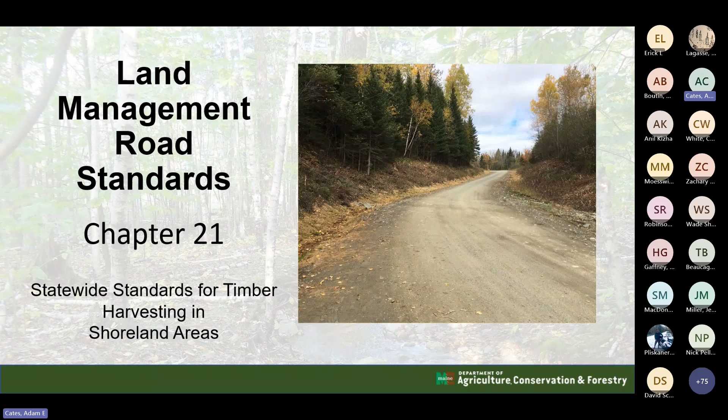Roads are a fairly short section here. There's not a lot new. I think you'll find that the roads are pretty much what everyone's doing now. I can't think of anything that would be different other than setbacks from water bodies, so we'll spend a little time on that.

So for us, this goes back to the jurisdiction thing. For us to have jurisdiction, the land management road must be primarily for timber harvesting and related activities. If it's a road to someone's camp and there's no timber harvesting involved, it's just a driveway to someone's camp, that's LUPC jurisdiction. It has to be a land management road for us to have jurisdiction. It does not include skid trails. By definition, they've got a difference.

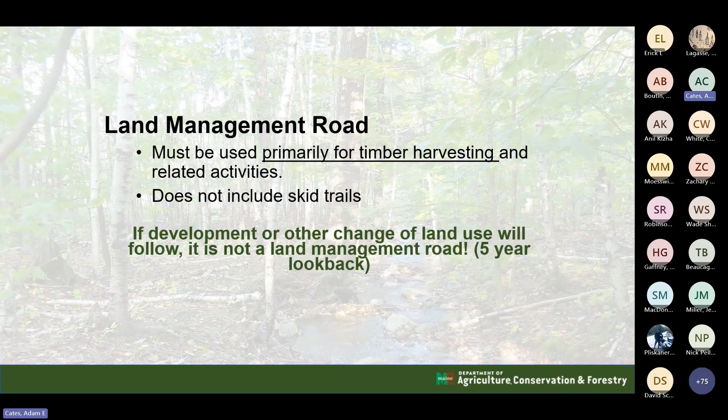If development or other change of use, and I've mentioned this, will follow within 5 years, it's not a land management road. There's that 5-year look back thing. I've seen this countless times where folks have done a timber harvest, known full well that it will be developed into something else, and tried to mask it as a timber harvest to avoid permitting and all kinds of other things. So just be aware that if development will follow, it has to meet standards for the other agencies or the town, wherever you're working.

So this is a difference. Again, like the shading standards, there's a difference here in setbacks between the organized and unorganized towns. In the organized, just like what we saw before, above 300 acres, it's a 25-foot setback. 300-acre drainage to 25 square miles, it's a 50-foot setback. And then below 25 square miles, it's a 100-foot setback. So your setbacks get bigger, the bigger the water body. That's organized.

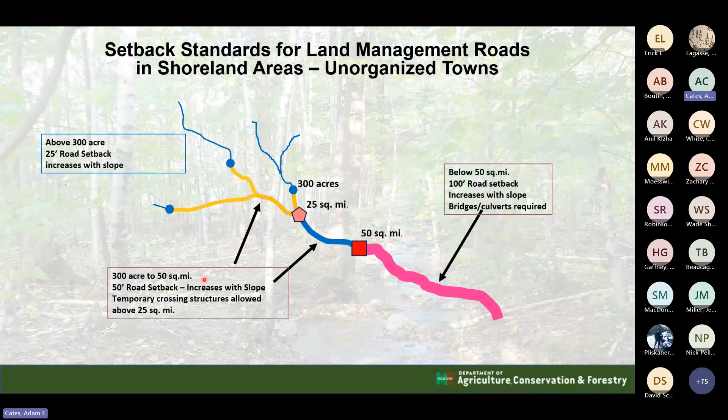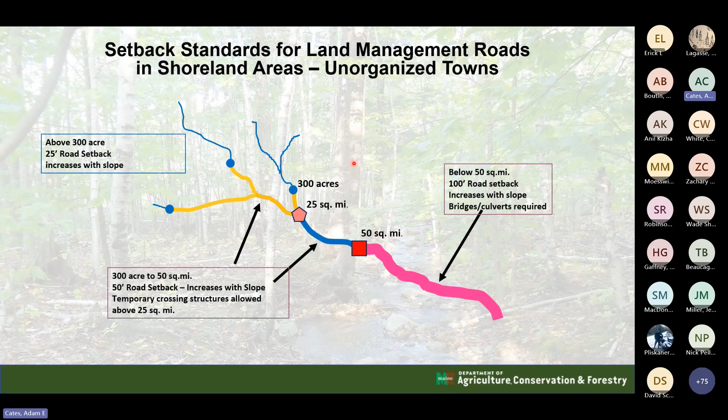In unorganized, there are some exceptions to that. So you basically have a 25-foot setback from your small streams. From 300 acres all the way down to 50 square mile drainage, it's a 50-foot setback, increasing with slope. We know what our filter chart looks like. From 50 square miles and below, it's a 100-foot setback. So again, in the rule, there's some exemption or a little more liberal interpretation of what can be done in the unorganized.

A little bit of difference here as well. Your smaller wetlands and small water bodies that aren't over 10 acres, still a 25-foot setback. Once you break the 10-acre threshold, it jumps up to a 100-foot setback. So Great Ponds will have, as of January 3rd, a 100-foot setback. Under current rule today, you can build a road on flat ground within 25 feet of a Great Pond. Risky, but you can. And this pushes that back out to 100 feet around a Great Pond.

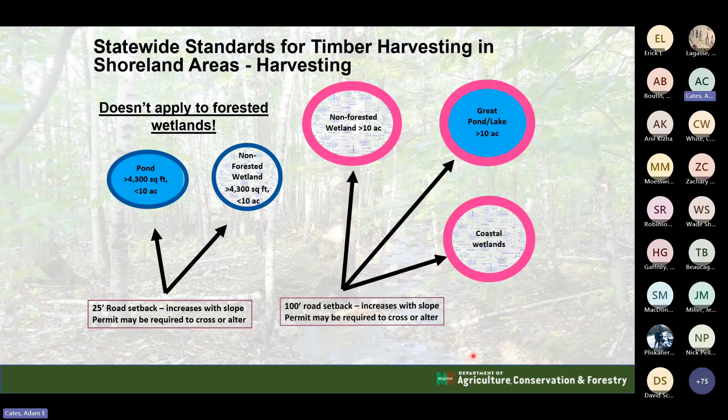Maine Forest Service can cut these numbers in half if you come to us and tell us why you can't meet these setbacks. It doesn't specifically say that there's a permit process or a variance process. It just says you have to tell the Bureau, which is us, why you can't meet these standards. And if we find that that's your only alternative, we can reduce that to 1/2. So if you came to us and said, I just can't meet this 100-foot setback, and here's why, we would go look at it and grant you a waiver. That's built right in the rule as well. So if you're pinched by ledge or something and simply cannot operate under these setbacks, call us and we'll take a look and work with you on it.

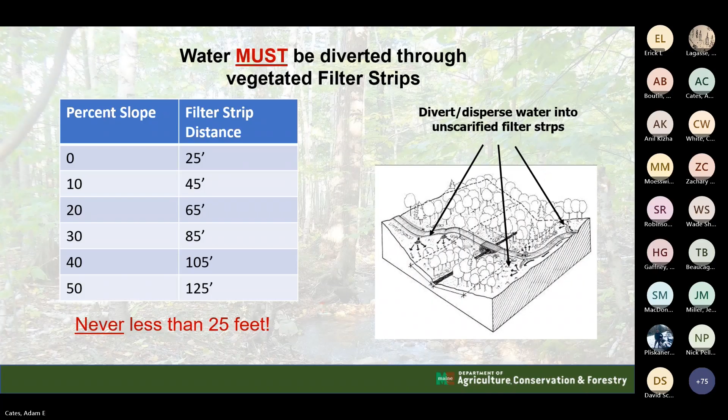I know you've all seen this, and I'm not going to spend a lot of time. Water must be diverted through vegetative filter strips. Nothing has changed here. This always has been and always will be. Never less than 25 feet. We see this a lot, and I still see it a lot: ditch termination into water bodies without adequate filter strips. Road ditches cannot terminate directly into streams, wetlands, or water bodies. You have to disperse water through a vegetative filter strip at least 25 feet, and that increases with slope. And we see this again and again.

The question often comes up with old ditches where, 30, 40 years ago, someone ran the ditch directly into the stream, but now the ditch is revegetated. It's got bushes in it, it's stable. That in itself is not a violation unless you go back and reditch it. So don't touch it. Use that as your vegetative filter strip, but don't touch it.

It's okay to cut the bushes, leave the root systems. If you need to do it for safety and visibility, that's fine. But once you take an excavator and start scooping and redirecting that water into the water body, stream or wetland, that's a violation. So by itself, if it exists from a grandfather reason, it's okay, but don't make it worse.

And we see this a lot. This is an example of a direct ditch termination. That's a wetland out there, in case you can't see that.

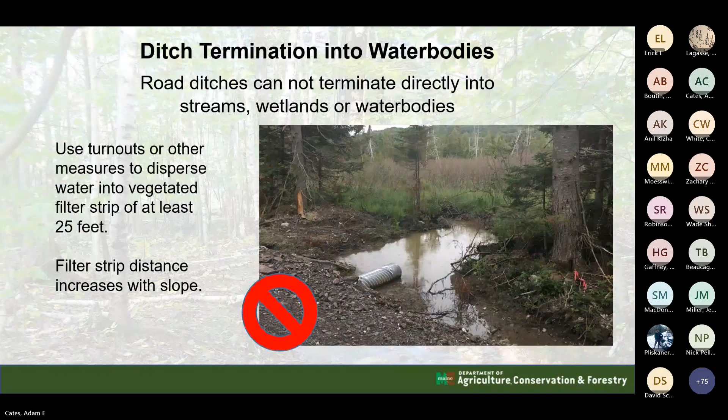I'm going to shift gears just a little bit on water crossings. Most of the road stuff is pretty straightforward. It's filter strips, setbacks. It's not a whole lot different than what you're doing now. Water crossings, the standards are essentially the same. There is a little difference, and we'll get into this, of permit by rule. We'll talk about that toward the end. We got a few more slides to go here.

So all land management road crossings, including approaches, ditches, and other structures, must be designed so that concentrated water runoff does not enter the water body or tributary stream. And that speaks to those filter strips. You have to turn the water into a filter strip.

Sedimentation of surface waters is reasonably avoided. There's no substantial disturbance to the stream bank. Fish passage is not impeded, and water flow is not unreasonably impeded. So this should look familiar because it was the same standards for the skid trails.

We've been asked the question, what does reasonably avoided mean? Or what does reasonable measures mean? In the rule, it actually references our BMP guidelines, the BMP book, as reasonable measures. So if we're looking for whether a reasonable attempt was made at controlling water, for example, in a filter strip, that book is referenced as guidance for what is a reasonable measure.

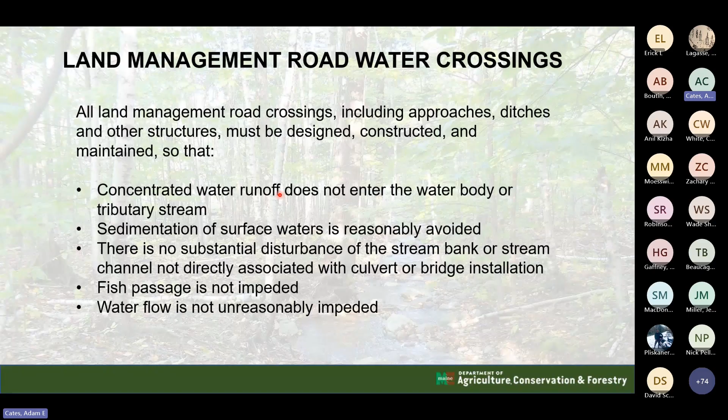This comes up, and this is important. In the unorganized now, in Chapter 27, there's no distinction between permanent versus temporary. For consistency, we've always tried to carry the same interpretation, but there was actually no distinction. Now in Chapter 21, it's spelled out. If a structure is installed longer than 7 months, a crossing is considered permanent.

And I can hear it right now. Somebody out there is saying, yeah, but what if it's frozen in? What if we can't get back there? What if we put it in December and it's now June and I haven't gotten back there yet? I'm going to be in trouble. No. We'll get to that in just a second.

If fill is used, the crossing is always considered permanent. And this flops over from DEP. Once you put dirt on a culvert, that culvert is considered permanent, even if it stayed in there a day. Once you put fill in the stream or it's below the normal high water line, that structure is considered permanent for our purposes. And permanent skid trail crossings are treated like land management road crossings and must meet sizing requirements.

I see this a lot in the organized towns where a contractor will go harvest a block of wood and put skidder panels in, cross over and cut the wood, and the landowner says, that's great. I want you to leave those panels in so I can cross that with my four-wheeler. That can be done. It certainly can be done, but it has to meet sizing requirements. It can't be undersized. At that point, if it will stay in place, it's got to be sized appropriately.

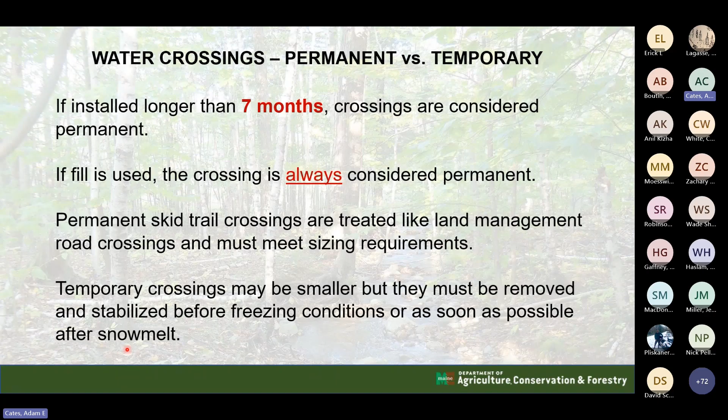This is a little different. Most folks on this call are oversizing culverts above standard anyway, or crossings above standard. I think we all realize we're getting some really, really crazy storm events, rainfall events. And I think most of the large landowners have started to upsize things to account for that.

Current rule is 10-year flow or 2.5 times. Chapter 21 is a 25-year flow or 3 times cross-sectional area. So that's a little difference between the rules in the sizing. So anything permanent has to meet one of these 2 criteria.

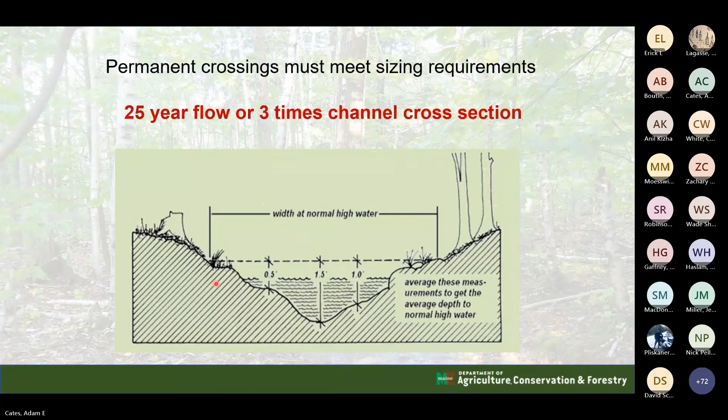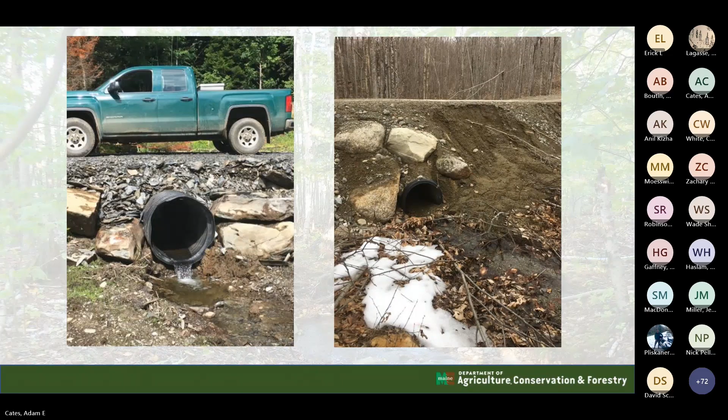So here's a few more things about land management road water crossings before we jump into permitting. I'm going to talk about maintenance really quickly too. I've got a slide on maintenance and upgrading roads, but there's just a few things left on road water crossings.

If you plan to use a culvert, it has to be installed at or below stream bed elevation, can't be perched, must be seated on firm ground. Soil must be compacted halfway up the side of the culvert. I have no idea how I would figure that out if I'm not there when you install it. Covered by soil to a minimum depth of 1 foot or manufacturer specs. And then it has to be adequately stabilized, head wall on the inlet end. We typically see riprap there.

This is something new in statewide standards. I'll point this out. If the water body being crossed is a perennial stream and has a slope of more than 2%, meaning the stream gradient, a bridge or pipe arch must be used to maintain the natural stream bed. So if you've got a stream gradient of 3 or 4% in a mountainous area, you cannot use a culvert and have the big waterfall at the end. You have to use an open bottom structure of some kind.

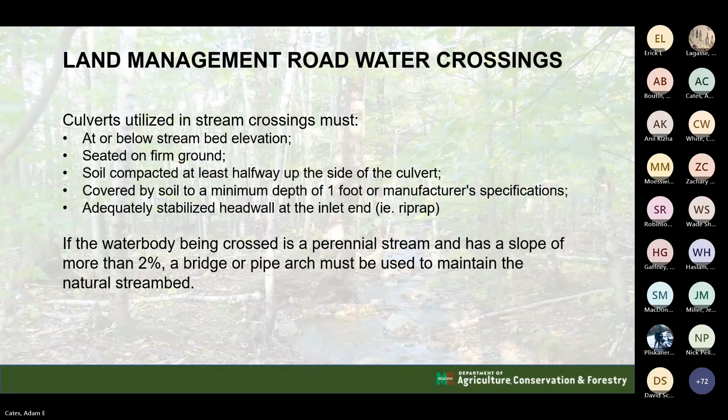A couple more slides before we talk about permitting, and the permitting is pretty short as well, so we're almost done. So maintenance and closeout. Like chapter 27, there's a provision in chapter 21 that ditches, culverts, bridges, all of the water control structures must be maintained on a regular basis to ensure effective functioning. Maintenance of the water control structures must continue until the road is discontinued or put to bed and the crossings removed. So like chapter 27, there's an obligation to either maintain existing crossings and water control structures or close the road out and put it to bed.

You can't build the road and just forever walk away and let things plug and wash out and do all the things that they do. It has to be maintained. So that's built into chapter 21 as well. This shouldn't be new. This is almost word for word in chapter 27 today.

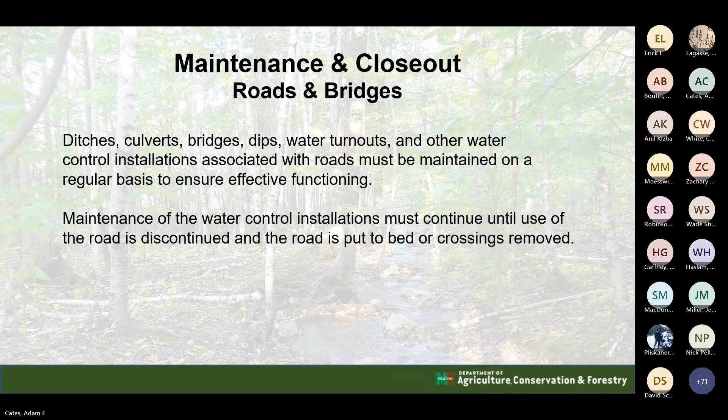So this comes up a lot, the question of upgrading existing roads and bridges. We understand that there are miles and miles of roads. There are hundreds and hundreds of bridges and crossings that are not up to standard, not up to these standards at least. They're allowed to exist and continue to be maintained as long as you don't make them bigger and as long as you don't make them more non-conforming.

So an example would be a road that exists today within the setback. You don't have the appropriate setback to a great pond, for example. You see them all the time. You drive by and say, what a pretty view. I can look out on the lake. This is great. But that road is within the 100 feet from the Great Pond.

You can maintain that road. You can maintain it within the footprint of what was originally there. You can harvest brush for safety, grade it, all the things that you would normally do to that. But you can't turn a 30-foot road into a 60-foot wide road. If you want to upgrade that road and make it larger, then it would have to comply with all the setback standards. You can maintain what's there, but you can't make it bigger or more non-conforming.

The same with the crossing. We know there are culverts and bridges out there that may or may not meet sizing standards. No one's expecting anyone to go rip all those up and put brand new crossings in. If you do take it out to replace it, you have to put it back to the chapter 21 standards. But you're allowed to maintain a crossing if it's non-conforming as long as you don't make it any worse.